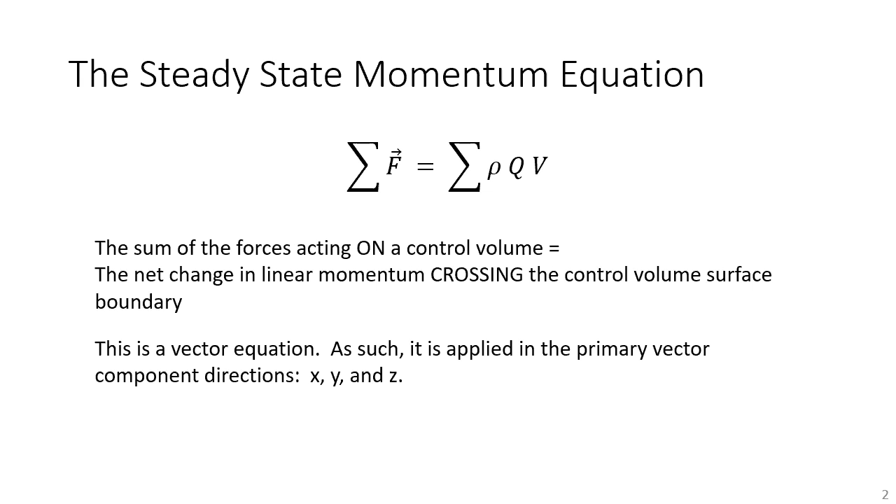This is the momentum equation that we've been dealing with. And for this momentum equation, we can apply that to any control volume, particularly when we see that the geometry of the flow field is changing and there are significant velocities involved, and the velocity vector has a significant change in that short distance. And then we started off last class talking about fixed vanes. And the nice thing about the fixed vanes is that you have all free jets in these systems, and it makes the analysis really simple. Really, the resultant force is the force on the vane, and there's no other forces.

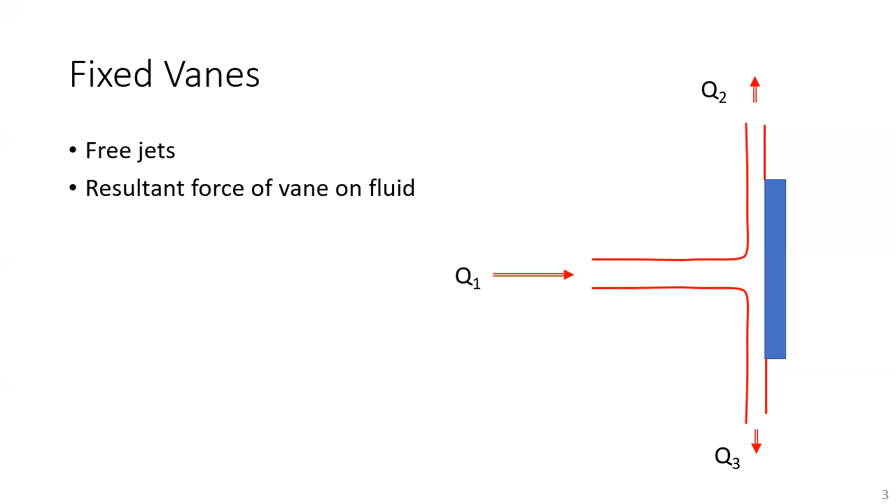Now, you could have some very specialized problems, for example, submerged systems, and you could have submerged jets on submerged vanes. Okay, I'll leave that to when you graduate and you're actually working in real applications, but you should be able to do this. In that case, you don't have free jets, you have submerged jets, but the analysis would be the same. And again, I've given you this rubric on how to do these problems, and this is the last time you'll see it today, but we always use that rubric when we're doing a momentum problem, and you should be able to get through it nice and easy.

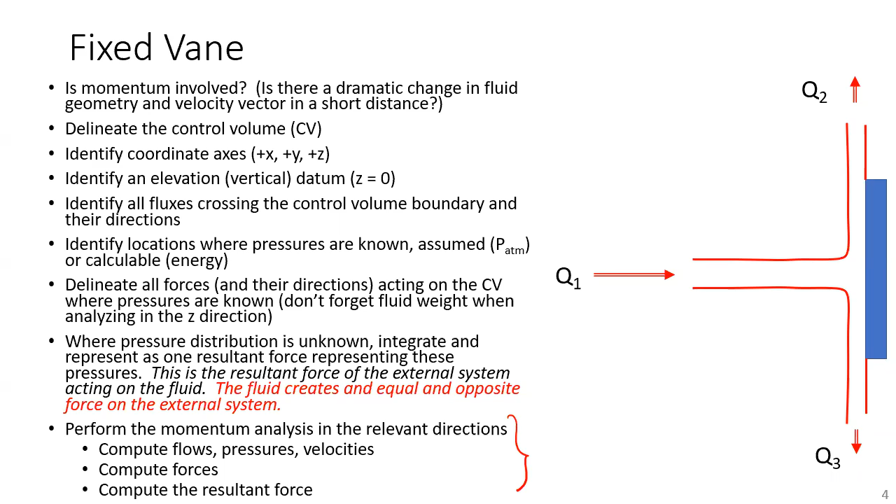And again, what you're ultimately after to perform the momentum analysis is at the bottom of this slide. You know, we need to have the pressures, the flows, and the velocities to perform the momentum analysis, and ultimately we will compute a resultant force. Again, fixed vanes. And then last time we talked about a vane example, and this is the example we went through. Did we do this last time? I think we did. Yeah, we did. Yeah, and so in this example last time, again, what you have is

a single vane. And that means it's only one vane all by itself compared to a series of vanes like you might see on a turbine or a pump. This is just one vane, like a snowplow or the scoop under the old steam engines. They would have a trough of water between the rails. They'd drop the scoop and the water would scoop up and fill the hopper again with water so the steam engines could keep going. So there are many instances of single vanes. And what we did was, in this example, we came up with a control volume. And for that control volume, we analyzed the system for these resultant forces.

When you have one entrance or one inlet and one exit, these are the equations you get. If you have more than one entrance or more than one exit, you will not get these equations. They'll look like these equations, but you just have more terms.

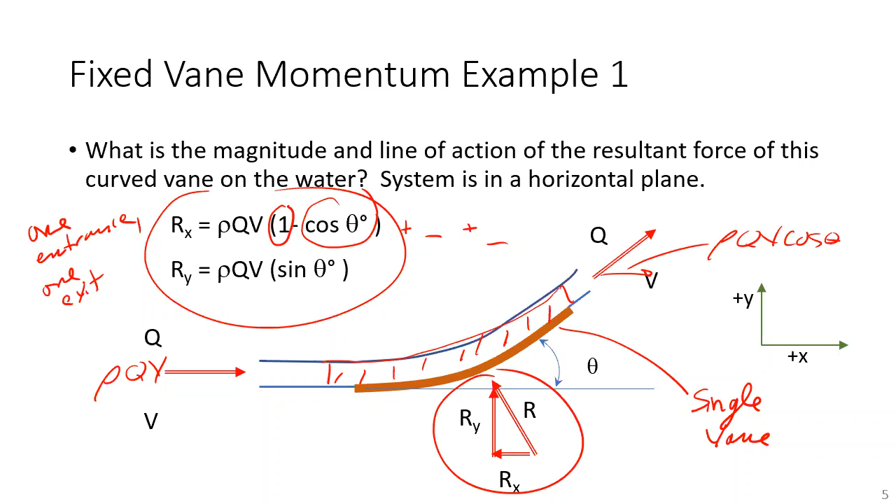You're going to see these two equations again because the examples I'm doing today are going to be just a simple vane with one location of fluid entering and one location where fluid's leaving. I don't need to recreate these equations unless you really want me to. I certainly will. So where we ended last class was we can have a vane now.

And for example, go back to our original little vane that looks like this. And we have a jet coming at it at V0. But now the vane can be moving either towards or away from the jet. So now the vane is moving. And this is an unsteady problem, which means we can't apply energy and we can't apply the momentum equation because both of those equations were developed for steady state systems.

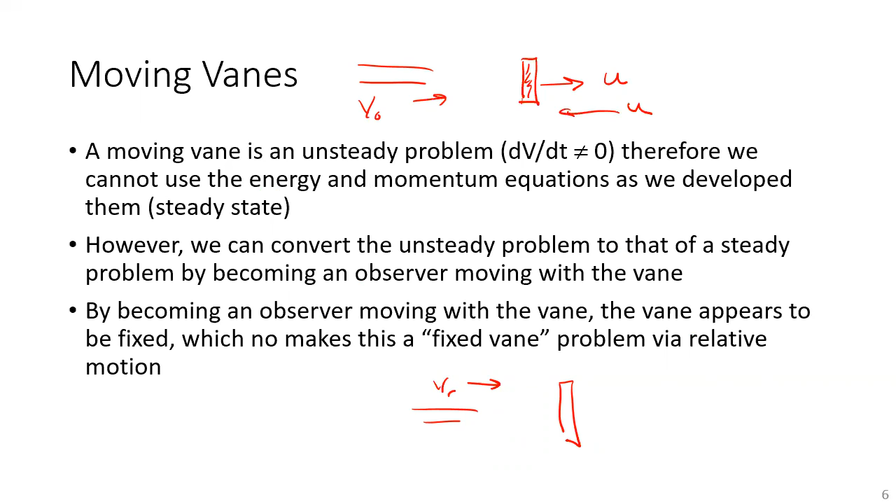So how we convert this unsteady problem to a steady problem is to become an observer moving with the vane. And so in that case, the vane is sitting still. It's a fixed vane problem. And now what you have is some relative velocity approaching the vane. By becoming an observer moving with the vane, it appears to be fixed, which makes this a fixed vane problem. And the last equations with modifications are appropriate.

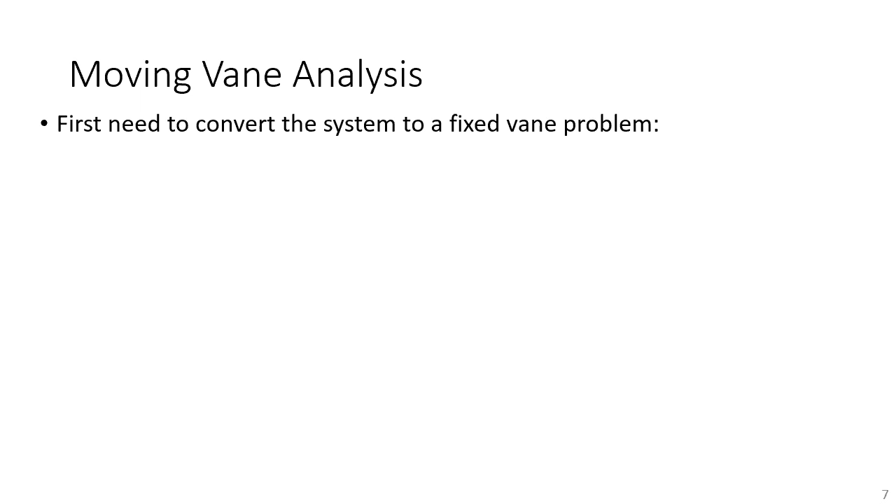So for the moving vane analysis, the first thing we need to do is convert the problem to a fixed vane problem. So again, this is the system as you see it as an observer just sitting in your sofa or sitting in your chair. The vane's moving, fluid's coming on at V0 and it's leaving at V2. And sometimes V2 can be almost 0.

If you think about a moving vane you have seen dozens of times, if you live in New England, snowplow. Is the snow on the road moving? No, it's got a 0 velocity. But when the plow comes by, it shoots off the plow. So V0 and V2, when this is an unsteady problem, are two different velocities.

However, if you become an observer moving with the snowplow, it appears that the snow is coming onto the plow and leaving the plow almost at the same velocity. Okay? So that's the difference between unsteady and steady. And so we need to convert this to a fixed vane problem. V0 is the approach velocity, U is the vane velocity. And again, you can be towards or away from the vane. And that's what distinguishes a pump from a turbine.

And there are a lot of instances when V0 is 0. I just gave you the snow. How about a ship and a propeller? The ocean is just sitting there and the propeller is actually moving through the fluid. The fan you put on in your room, the air in the room is more or less just sitting there and the fan all of a sudden is generating flow.

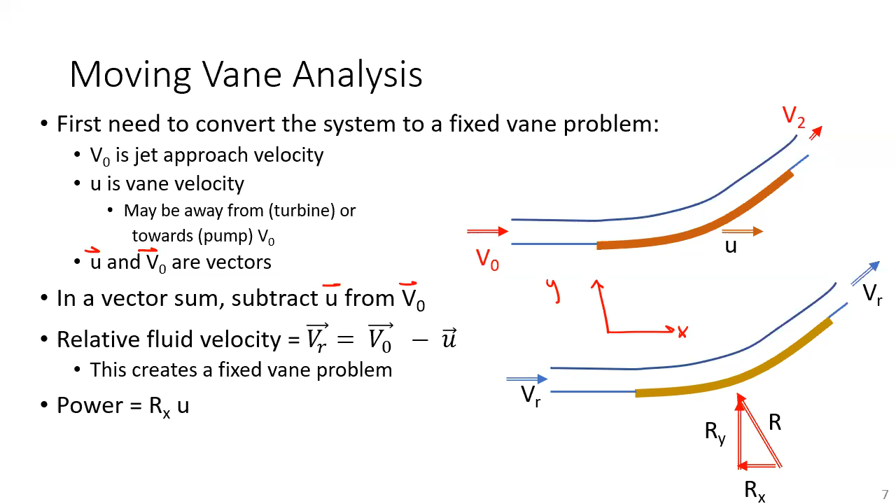And since this is a moving vane, now what we can do is start to look at power. And the power either put into the vane or the power the vane takes out of the fluid, whether you're looking at a pump or a turbine, is the horizontal component of the force times the vane velocity u. Because again, the vane is sitting some distance away from the center of rotation, and this force is being applied at a certain rotational speed.

So force times velocity gives you the dimensions of power: force, length per time, Newton meter per second, or foot-pounds per second. Foot-pound per second can be converted to horsepower, as you saw when we were talking about energy. Newton meter per second is a watt, and we typically just convert that to kilowatts.

So let's do an example now that we've walked through the principles of the moving vane. I'm going to show you a single vane. And again, after we finish single vanes, we'll talk about series of vanes. There's just a minor manipulation. That's all you have to worry about. So for the single moving vane, what you're trying to do is calculate the force components parallel and normal to the approach jet due to the water jet. What is the rate of work being done by the vane?

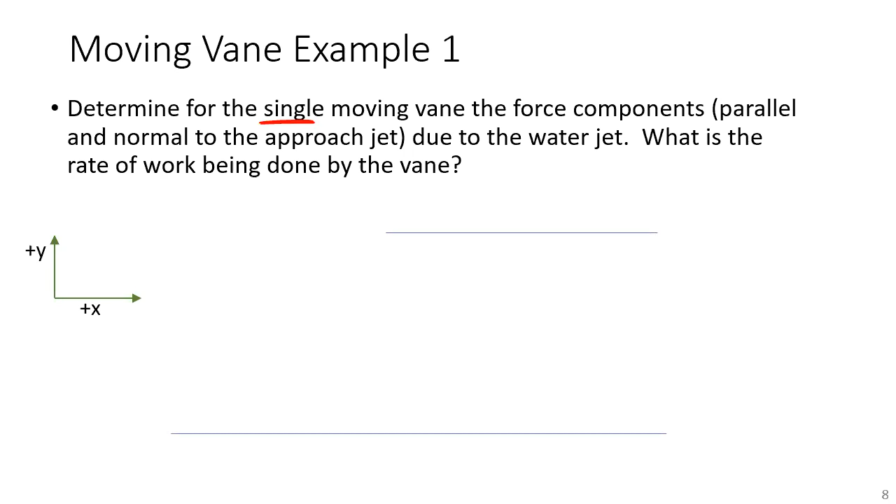So this is what the problem looks like. It's in a horizontal plane. And these are just construction lines, parallel construction lines. And what you have is a vane whose final angle is 10 degrees off of the horizontal. So if this went fully and turned the fluid all the way around, that would be a 180-degree angle, right? However, it's not going through a full 180, it's actually turning the fluid through 170 degrees, okay?

And in the problem we did last class, we had a simple 30-degree angle. But again, this angle is what will be used in the equations we developed. Last time I explained that no matter what the angle is, you get the same equations for Rx and Ry. So we're going to have an approach jet coming at this vane at 120 meters per second.

It's always good now and then to use SI so you remember how to use it. I have yet to do a design project in the United States that uses SI. Some federal agencies want to see it in reports and scientific reports, but in this country, we're still using BG.

The cross-sectional area of the approach jet is 0.001 square meters. And obviously, if I multiplied those two together, I would get the approach discharge, 0.12 cubic meters per second. The vane, however, is running away from this approach jet at 40 meters per second. That's obviously slower than the 120 meters per second. So this jet is going to hit this vane right along the surface and come off of it at some velocity. And that velocity is not 120 meters per second, as you'll see.

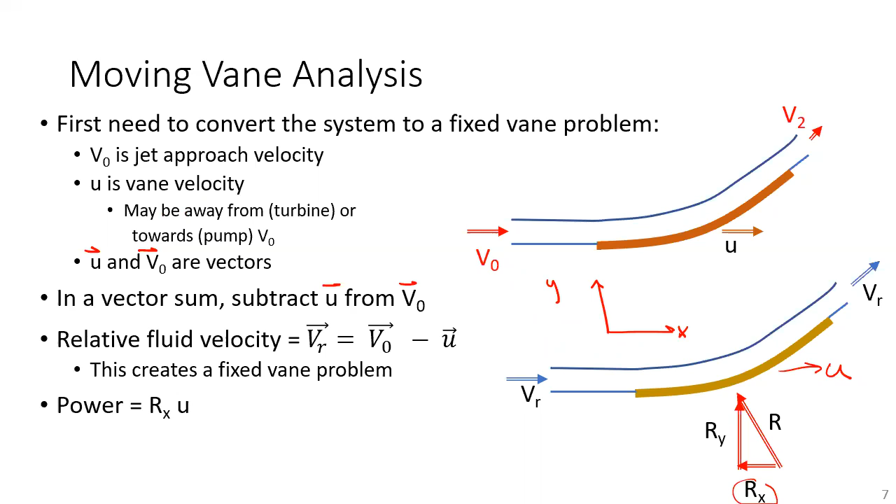You first need to convert this unsteady problem to a steady problem by removing the vane velocity from the approach velocity. These are the steps that were on the previous slide. I'm going to zip back really quickly. So these were all the steps on the previous slide. So the approach fluid velocity is 120 meters per second. That's V0. For U and V0, we call to the right the positive x direction. So V0 is a positive 120, U is a positive 40, V0 minus U is 120 minus 40, or 80 meters per second.

Okay, so now that it's a fixed vane problem, you have VR as 80 meters per second coming on and 80 meters per second going off. Remember, this is in a horizontal plane. And what we do to demonstrate that you have that velocity is just write a Bernoulli equation from the inlet before the vane to the exit after the vane. P over gamma is 0, it's in a horizontal plane. Both of the Z values are the same. V entering has to be equal to V leaving because it's in a horizontal plane.

So then we want to calculate these force components. And again, we have already derived that we can get the force components from a momentum analysis of the vane on the control volume of the fluid just entering and just leaving the vane surface. Would you like to see these developed again? Yes? Yeah.

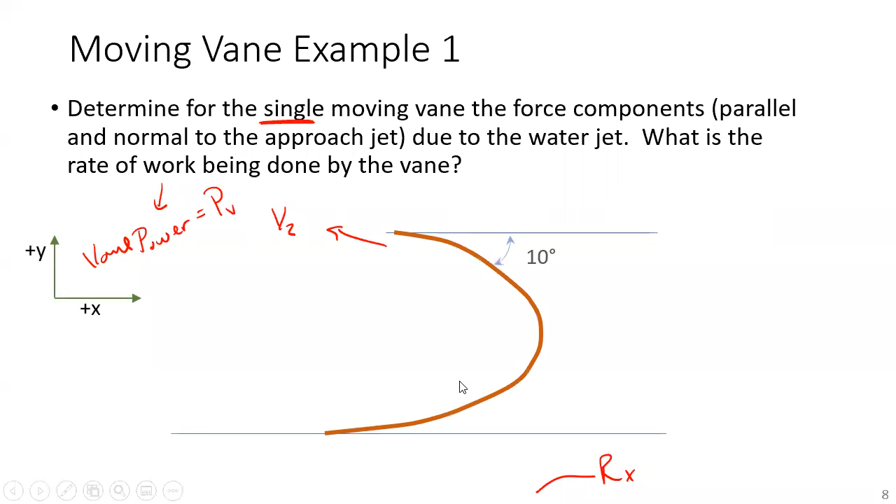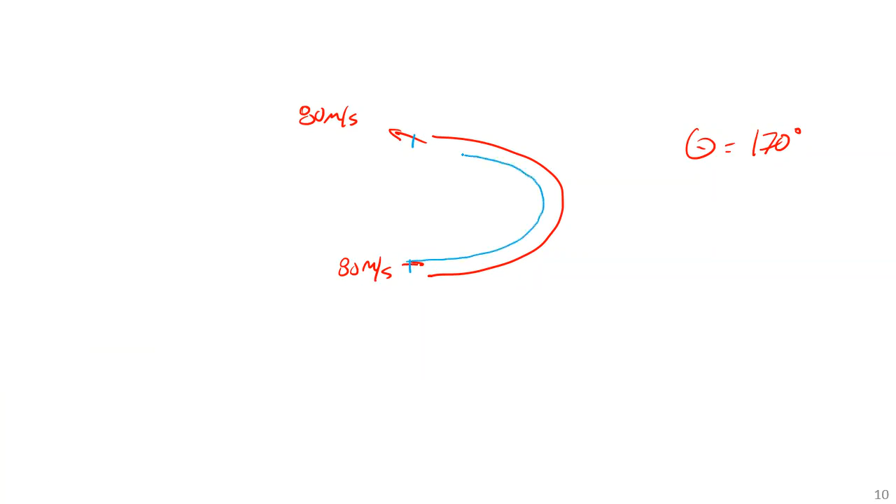So here is our vane, and we have 80 meters per second coming on and 80 meters per second coming off at a vane angle equal to 170 degrees. And the next thing we do is draw the control volume. So the control volume is going to start just before and go to just after the vane.

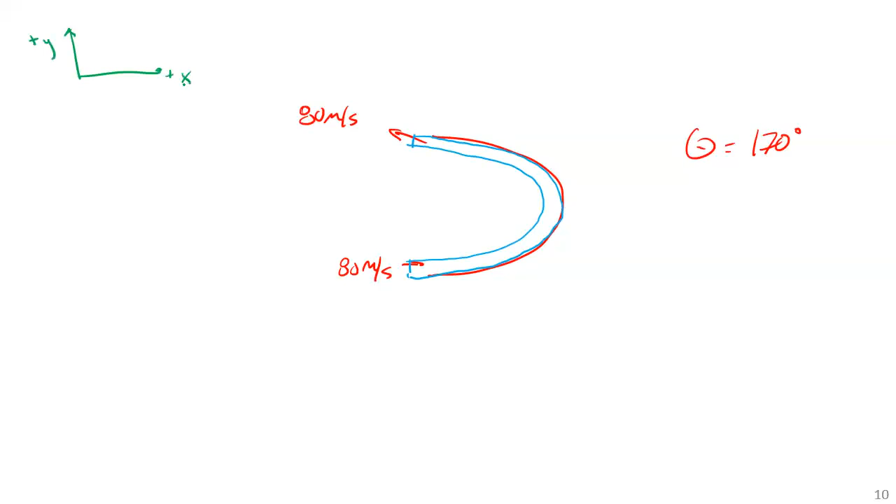That's my control volume. And then as we have done before, again, I'm just going through all those steps I said I wasn't going to put on the board again. Here is our coordinate axis system. And Z is equal to 0 in the plane of the vane. Okay, so again, I'm just going down the steps in that rubric. So for this, we've got a rho QV term entering here. And this is rho QVR. And this is entering, and we've got rho QVR leaving.

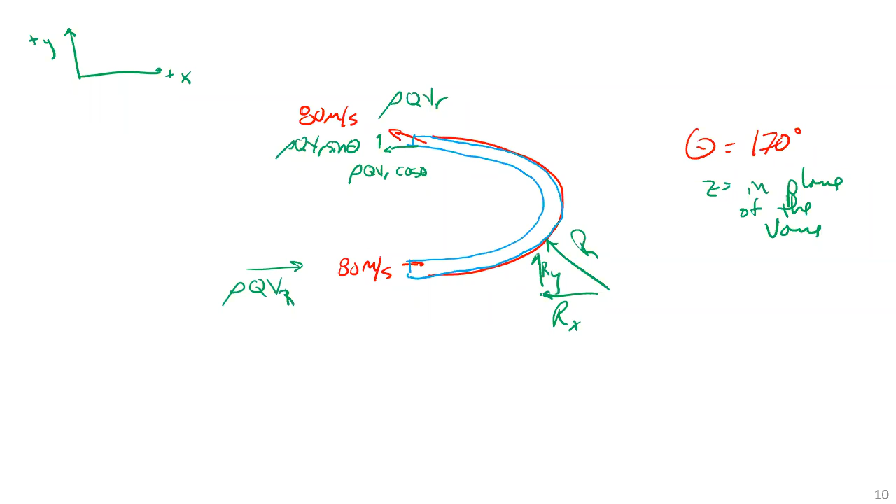And that rho QVR has a component in the horizontal direction, and it has a component in the vertical direction. And then again, we assume that we have this resultant force vector. We're just assuming the direction, and it has components in X and Y. And so then what we would do is say in the horizontal direction,

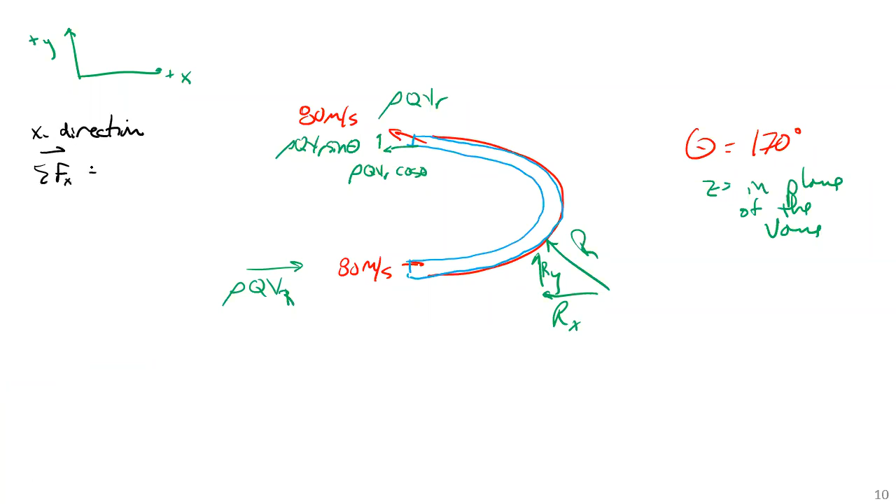sum of the forces in the X is equal to the sum of the momentum fluxes in the X. The only force component we have in the X is Rx, and it's directed in the negative X direction. So minus Rx is equal to the rho QV term entering; the velocity vector is in the positive x direction, and the rho QV term is entering, which is a negative. Negative times a positive is a negative: minus rho QVR.

And then at the second location, we've got a rho QVR cosine theta term. The VR cosine theta is in the negative x direction. And the term is leaving, so that's a positive. But as before, if this thing had only gone through 30 degrees up to 90 degrees, the cosine of theta would be a positive number. Once theta gets to be greater than 90 degrees and up to 180 degrees, cosine of theta is

a negative number. So I'm just going to leave that as a positive rho Q VR cosine theta, because I know the cosine of theta is going to give us that sign on the velocity vector. So therefore, Rx is equal to rho Q VR times 1 minus cosine theta. Again, because theta is 170 degrees now, cosine of 170 degrees is like minus 0.98. So it'll be 1 plus 0.98.

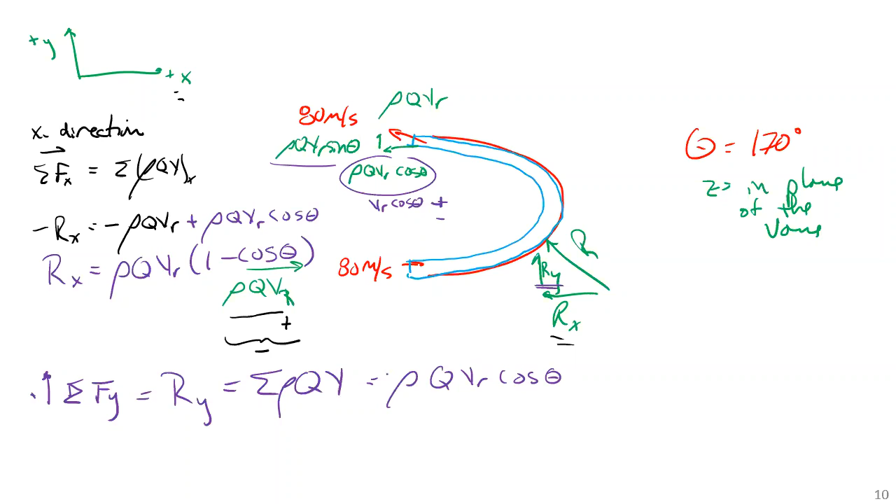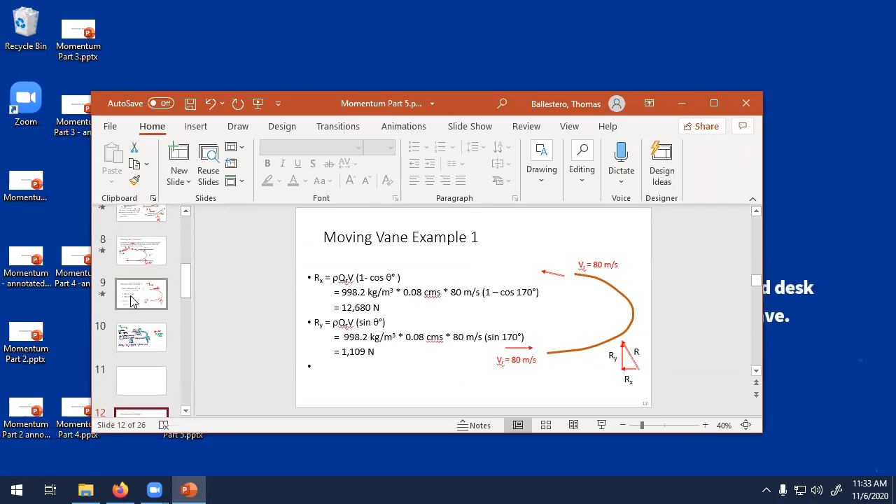So if you look in the y direction, the only force we have is Ry, and that's in the positive y direction, and that's equal to the sum of the rho QV, and there's only one term in the y direction. It's again equal to rho Q R. And so if you go back to where this all started, we were on this slide, and my question was, do I need to redo those equations? So I just redid those equations.

So again, these equations are good for any single vane in which there's one location of entry and one location of exit. So we know what the density is. We have a water jet, so that's a little less than 1,000, say 998 kilograms per cubic meter. VR is 80 meters per second. Theta is 170 degrees. And what we now need is the discharge, QR. QR is the relative velocity, which we calculated before, times the approach cross section. So that's 80 meters per second times 0.001 meters squared, 0.08 cubic meters per second.

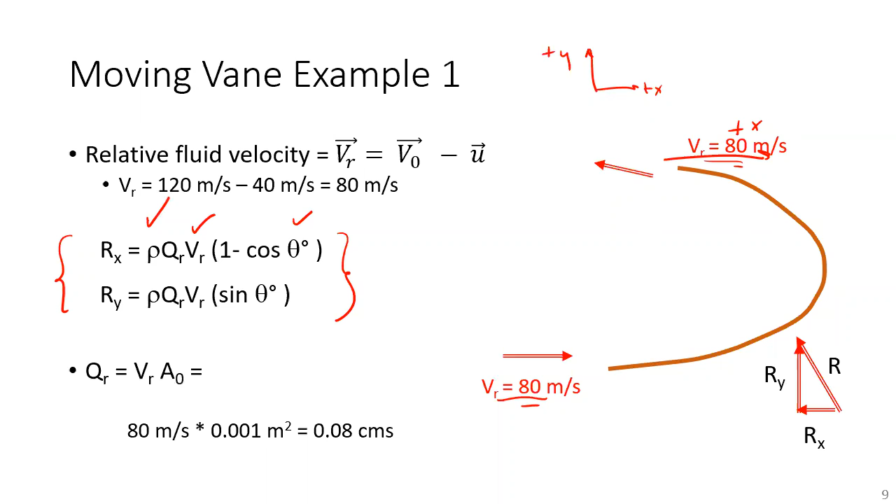And so basically now you have everything to calculate what you were asked to first do. Give me the components parallel and normal to the approach jet. And we're just going to use those two equations. And again, I developed those equations. So here's our moving vane. And here's the x direction equation. Density 998.2 kilograms per cubic meter. Discharge 0.08 cubic meters per second.

Velocity, that should be VR, 80 meters per second, times 1 minus cosine of 170 degrees. And that gives you 12,680 newtons. And remember, this is approximately minus 0.98. Again, there's a double negative in there.

Similarly, Ry is rho QR VR sine theta. And similarly, we can just put in all the information we know, and we find out that the vertical component is really small, and that's because you're turning this thing almost through 180 degrees. If you turn this jet completely through 180 degrees, there would be no Ry.

So this is what we just found, Ry, Rx. And I've redrawn what that looks like on the vane. So Rx is really large. It's almost a little more than 10 times Ry. And if we wanted to know the magnitude of the overall vector, the total resultant force, the magnitude of that force would be the Pythagorean theorem, the square root of the sum of the squares. And when we put that in there, we get 12,730 newtons.

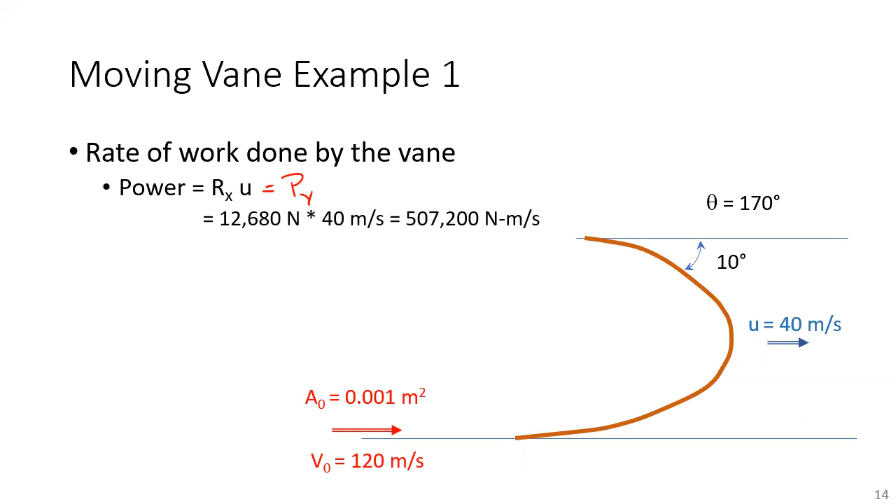So in this case, we calculated the x component is 12,680 newtons. That was on the last slide. Vane velocity is 40 meters per second, and that gives us 507,200 newton meters per second, which is 507,200 watts, which is 507.2 kilowatts.

Okay. So you were asked to get the force components perpendicular and parallel to the approach jet. You were asked to calculate the rate of work being done. If you were just asked to calculate the rate of work being done, you only needed Rx. You didn't need Ry. Again, on an exam, it's all about using your time efficiently. Make sure when you read a problem, you know what is being requested of you.

Don't create extra work for yourself, because let's say this was an exam problem and you were just asked for the rate of work. If you calculated the value of Ry, that's nice to know, but we can't really give you any points for that, can we? Because it's not part of the problem. That's like you writing down what the temperature was and what the weather was outside. It's nice to know, but you're not going to get any credit for that on your homework or your exam.

So let's think about what happens before and after this actual moving vane. Before the vane, you have this jet coming at the vane, and all the energy is being held as kinetic energy, V squared over 2g, specifically V0 squared over 2g. So the energy grade line, again, this is a free jet. This is a free jet entering. And so somewhere, remember, the z direction is perpendicular to the plane of this slide, is V0 squared over 2g above this surface. That's where the EGL is. And then the fluid is riding the surface and it's going to leave at V2.

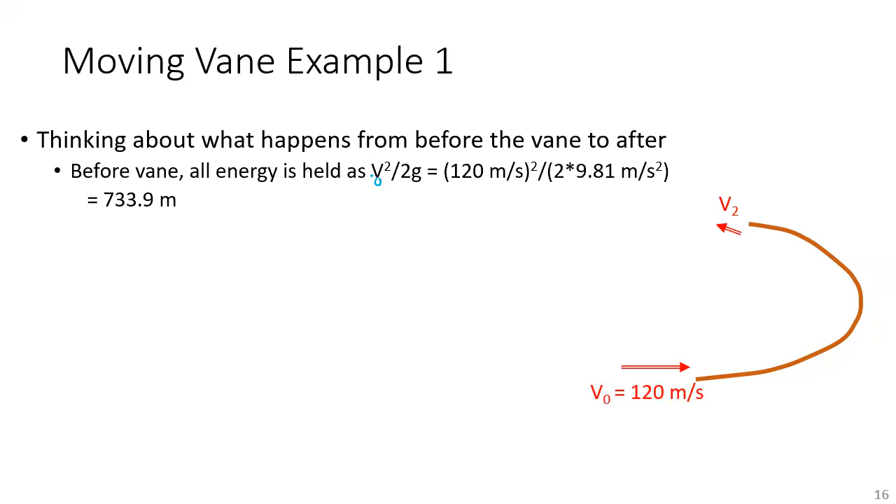The fluid power before the vane is QR gamma V0 squared over 2g, where the discharge, again, was VrA0, 0.08 cubic meters per second. Specific weight of water, 9790 or 9800 newtons per meter cubed. And then the V0 squared over 2g, we calculated just above as 733.9 meters. And then I divide that product by 1,000 watts per kilowatt to get an answer in kilowatts. And if you recall, we calculated the vane power in kilowatts as well. So that's the power entering.

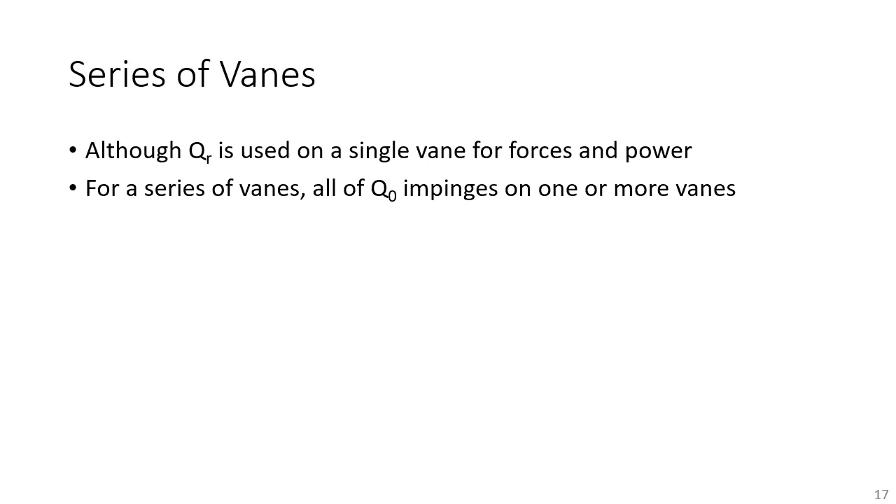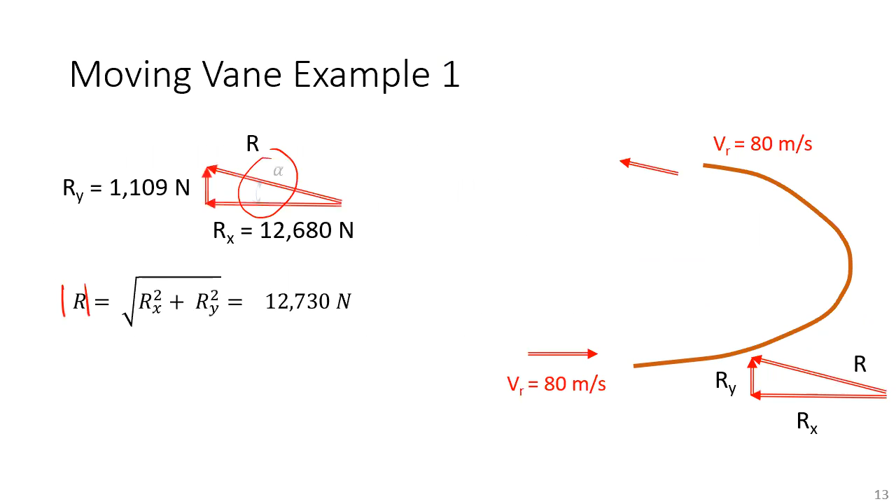Although the relative discharge is used for the single vane for forces and power, for a series of vanes, all of the flow, Q0, is hitting or impinging on one or more of the vanes. And so when we look at the force and the power equations, we need to use Q0 and not QR. So I'm just going to go back to the single vane problem. Yeah. So in the single moving vane problem, we're using the relative discharge in the forces. And when we get to the power, that relative discharge, again, is built into this.